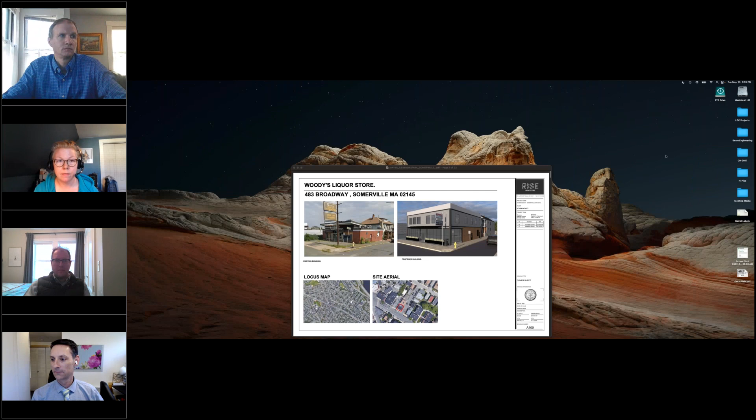I wasn't prepped too much on how this was going to go, but I'm assuming it's similar to other ZBA meetings, so I guess I'll handle it that way. Would I share the set of plans that we submitted? Does that make sense? Let me see if I can navigate that. How about that? There we go. Should have the set of plans in front of us there. So as you know, this is an MR— thank you, sorry, what's that? Just wanted to confirm we can see your slides. Thank you, okay, great, excellent.

Thank you. So as mentioned, this is an MR4 zone, and we were seeking a variance for a couple of elements that we received, in order to keep the project in scale with the neighborhood. That's why we only have a 2-story structure proposed here, as opposed to the requirement of 4 stories.

This is what we have so far generated in terms of our design. We were keeping as much of the existing building as possible and just extending it towards Somerville. Right now, currently the building is existing here, as you can see in the top left slide. It's completely contained in Medford, so we would be adding into Somerville, and that's what puts us into the current status that we're in.

With that said, the area that we're adding into Somerville is a total of 505 square feet, which is relatively small in proportion to the whole building. As you can see here, that red line is the line between Somerville and Medford, and what we'll be talking about tonight is the area that pertains to Somerville in our facade and the exterior that we're working on.

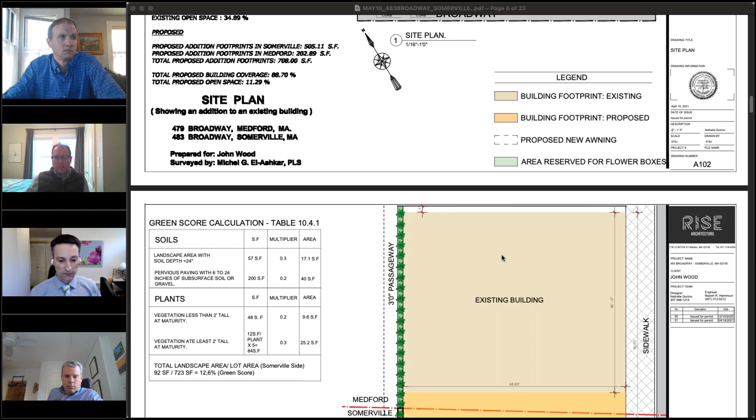We've been looking at our building and site and trying to maximize what we have in terms of available space, not only for the use of the lot and the building, but also for the amount of area we can use for plantings and things like that. Based on our neighborhood meeting, there was certainly some input from the neighbors that said it'd be nice to have some green area.

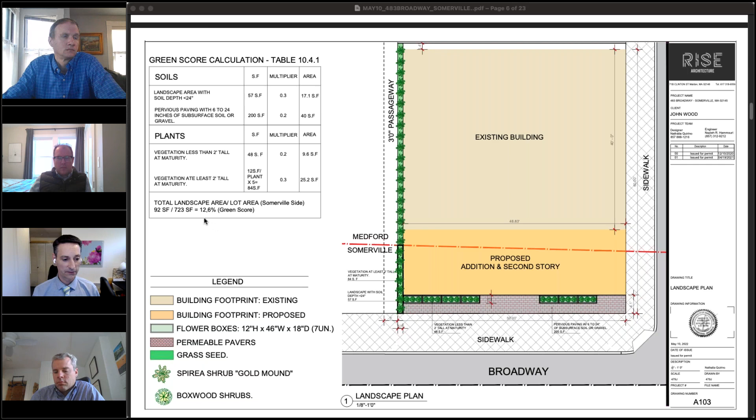So as we were mentioning, trying to make the most of what we can that's available. The building is existing, and our idea was to not disturb our boundaries with the neighbors on the existing sides, but just to extend to the area that's really not too usable otherwise at the moment with the new building. So based on that, we've worked up our green score, trying to get it as high as we can. As proposed in Somerville, we have 12.6% on that, and again, that's based on what we have available in the space we have here.

And currently there is, where the sidewalk is highlighted, if we go back to the existing site, you'll see that we had a curb cut currently right here, that on the existing site only was about 14.8 feet from the property line to the existing building and structure at the front entrance. So really not enough space for a car at all to park, but yet that is what people were doing, and therefore it was sticking out into the walkway that passed the property line. So really nothing could be used there for parking.

So our concept was to seal off that curb cut and allow parking along the street as it does down the rest of Broadway, and gain a few spaces that way that can actually be functional and usable. As we go down here to our building...

We can look at, and again, we got a variance approved for the height to keep it lower than what's required. There's a 10-foot height requirement for the second floor. We have that reduced as well.

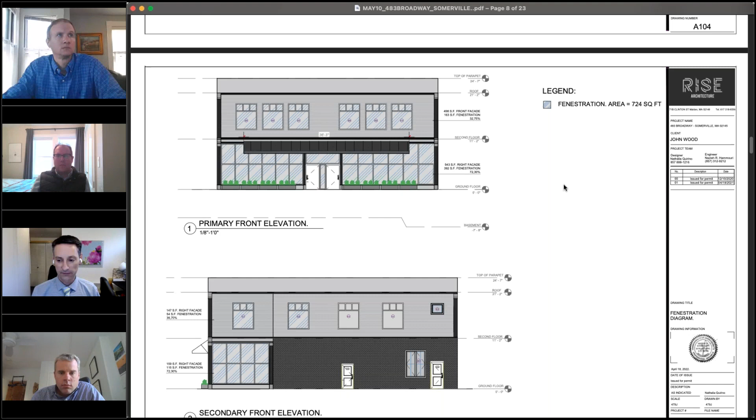And again, if we look at our concepts here and the existing pictures, it really is a neighborhood of residential buildings around it. And even the Salvation Army building to the left is a relatively low structure. So we're trying to mesh the two neighborhoods, so to speak, as we are on the border of both, and keep it in line with what's around it.

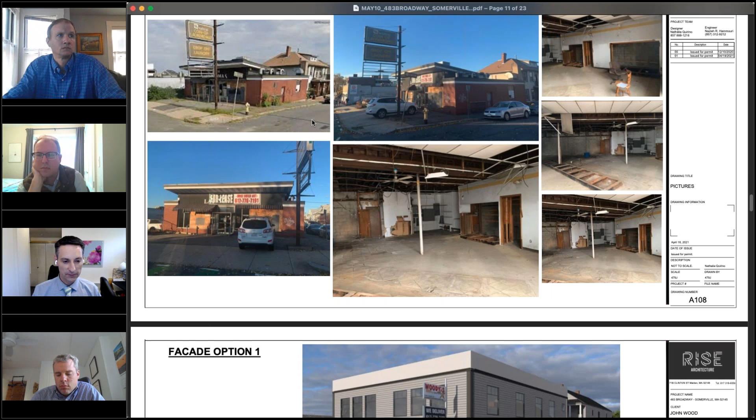You'll see a variation of wood structures as well as brick structures nearby, and some of those can be seen in these pictures, but not quite all of them. So based on that, we were trying to incorporate some of the brick that we have in at least one of our renditions, but this was our facade option that we had initially thought of, with some wood siding, a different material, smooth surface for the parapet to kind of break that up. And then here you can see the existing brick structure that we were adding on to.

And so that's where we'd start our facade for the entrance and around the corner there. And so that is this element here with our plantings. We're trying to get as much as we can, obviously not a ton of space available for us. Our second facade is similar, but it's more of a traditional panel design on the corners, with some inlays and some wood panels framing in those openings a little bit more. Again, similar with the wood, just a little bit different take on that, and you can see that here as well.

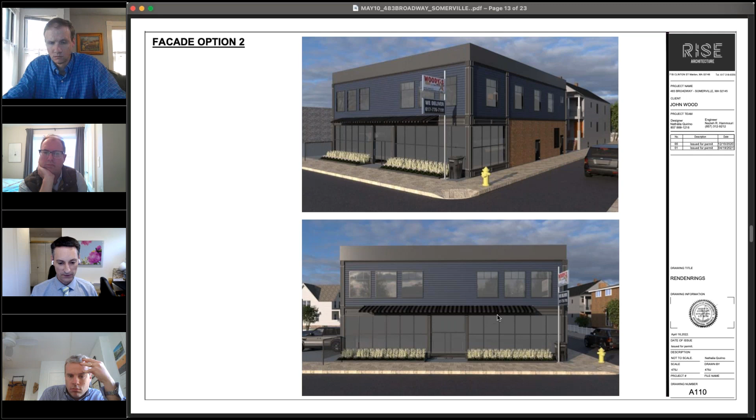And then our final facade, we're really incorporating more of that brick. So as you go down Broadway, you'll see more of this brick as you go towards the center intersection there. And so this is trying to work some of that back in, with a little more classical detail around the windows, with these arches and some overstated window sills as well.

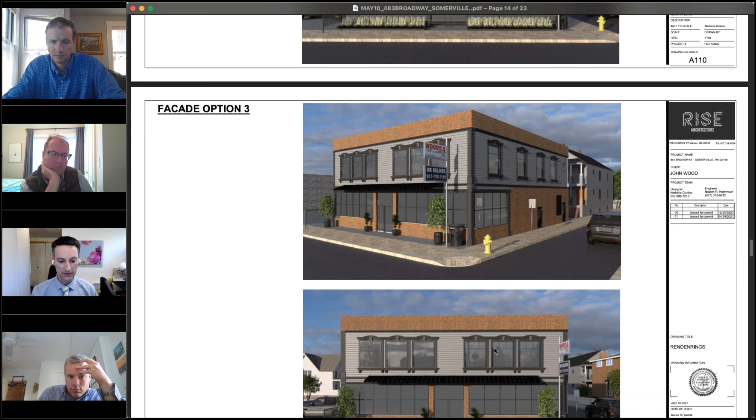So again, the idea is really to try and come up with a facade that blends the two neighborhoods, but also enhances the neighborhood, something that the neighbors will feel like belongs here, and it's in the right proportion, right scale, and not really trying to make it look too massive and overbuilt.

And so that was really the concept for the look. Space-wise, it's going to be two spaces. The first floor is going to be one retail space, a smaller one for a tenant, and the other is the larger for Woody's Liquor Store, who's the owner of the property. I'm not sure if he's on with us today, but this would be his space, which has two stories, as well as the retail space, which has a storage space above.

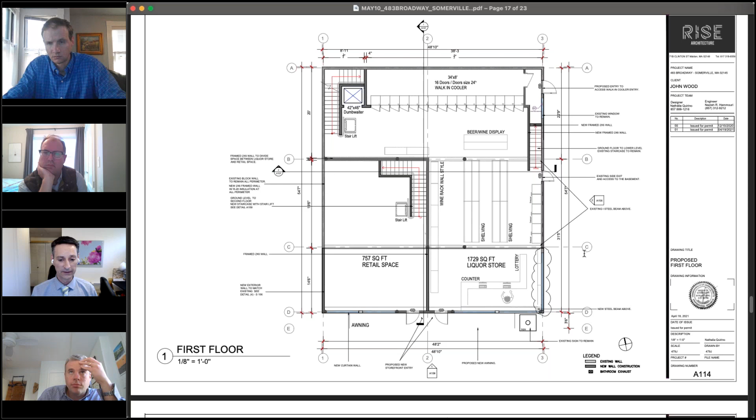And so that was the intended use, is this would be storage. He does need a lot of storage. And then the second floor for the unit would also be storage. So at the moment, he doesn't have a tenant, but he didn't want a restaurant or anything like that. So that was not in the plan.

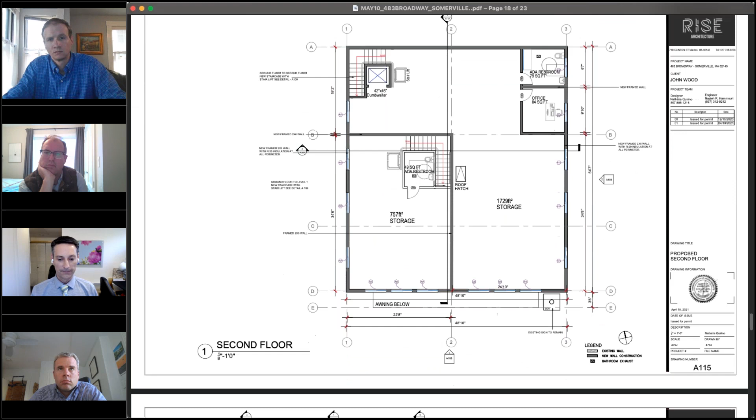There was some talk about what would be decided on and how that would be governed, if it would be governed, who would be the tenant. But I think that does come under the purview of Somerville in terms of who rents the space. So that might be something that would be discussed.

Another element that we discussed in our neighborhood meeting was mechanical equipment, which will be contained on the roof within the parapet, so sound will be isolated from that. They won't actually be located in the Somerville portion of the building. They'll be in the Medford portion towards the back. But that considered, we did talk about sound and how that would affect anyone nearby.

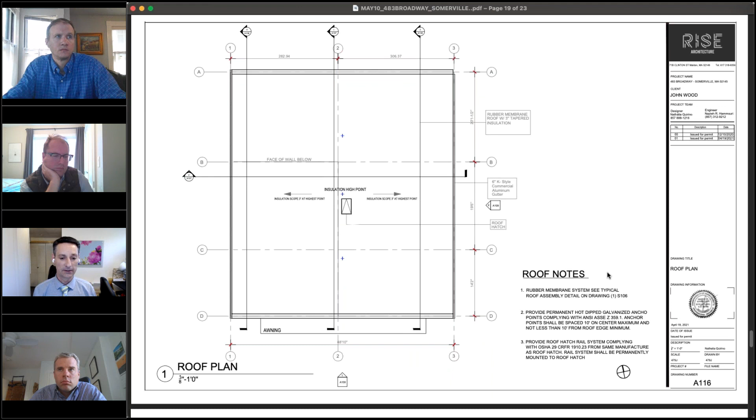But based on what we had in our specs from the mechanical engineer, the volume and the decibel level was much lower than what could be considered the maximum at street level. So we should have relatively no impact on the sound, at least on the Somerville side.

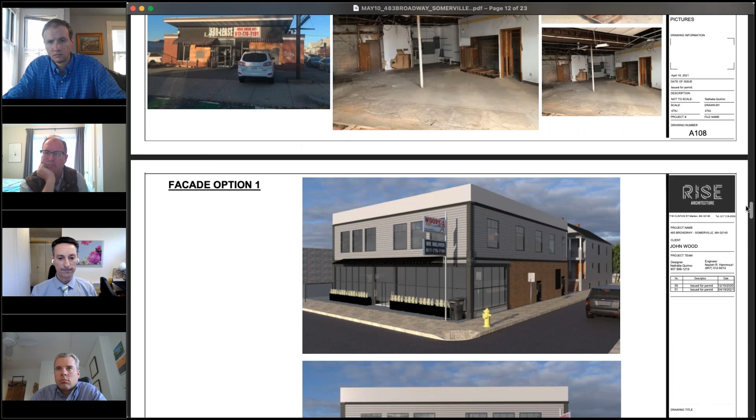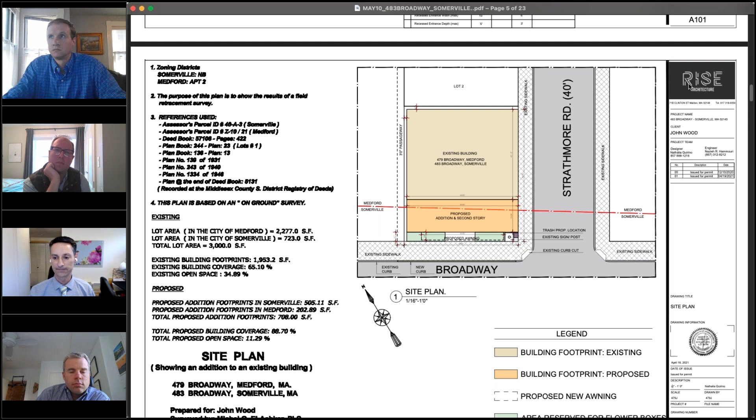And the overall building height, we're at 24 feet 7 inches from the ground up. So that's really the parameters of the project, and why we're at the point where we're at in terms of scale, size, area, footprint. Happy to answer any questions, but at this point I think we can turn it over to the commission. Thanks, Tavis.

Commissioners, do you have any questions at this time?

Can we just confirm the setback from the back of curb is 12 feet? I'm not sure I saw that dimension on any of the plans. Can we confirm the setback of the face of building from front of curb or back? I think it's just making sure that it's the 12 foot required. So, if we put a dimension on this curb here on the sidewalk, we have 4 feet from the property line to the building. I know that much, but I'm not sure what the sidewalk is. We don't have a dimension on that depth. It looks like it makes it, but it would be good to confirm. Yeah, sure, that's a 12-foot requirement, so I'll make sure we have that.

Deborah, I think you had your hand raised. Yeah, I had a couple of questions. The first one is, it has a very heavy top, and I'm wondering what happens at that top, aesthetically. And my other question is, I see a garbage can or a recycling can or something in the front of the building on the corner, and I'm wondering if you looked at ways of accommodating that, not putting it out on the sidewalk.

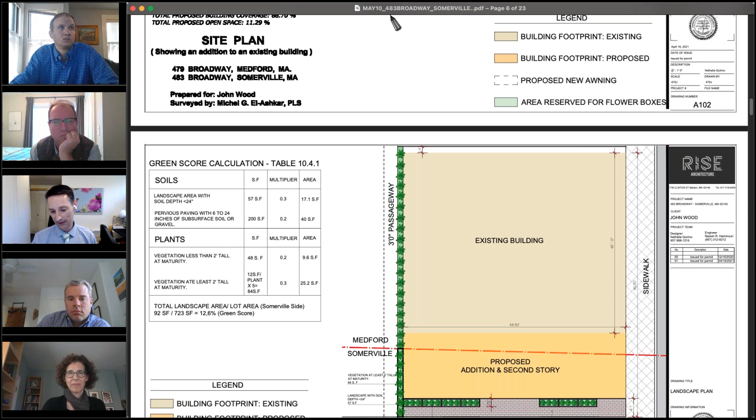But in answer to your question in terms of top heaviness, the building extends up as a result of a parapet that we have going around to really hide the mechanical equipment and also contain the water runoff and direct it to the scuppers that we have going out to our downspouts. So if I go to the section here, you can see exactly what that looks like, in this area here. It's one of those fairly common architectural designs for flat roofs, but that's what's happening up there, in case you want.

I'm just thinking it would be great if that garbage can were not on the street or outside. Or the building created a place for it where it could be hidden from the sidewalk. Anyway, I appreciate that you have it there, so it could be talked about, and it's something you resolve at some point.

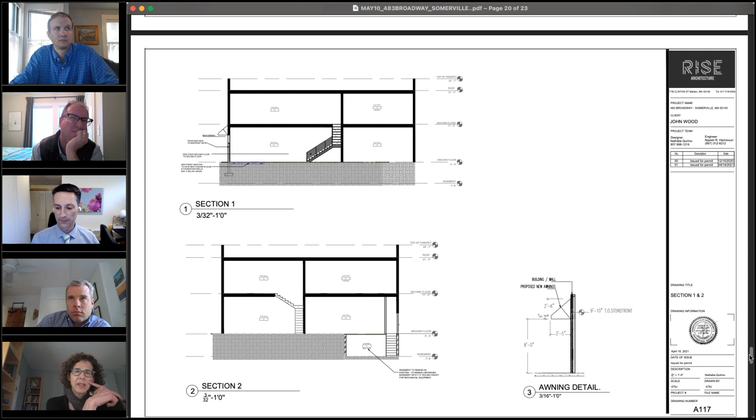And then the only other question is, the canopy doesn't cover all the windows, I imagine. What's the exposure of this? Is this the south side of the building? I'm just curious what the thinking is on the canopy and why it doesn't go all the way to the ends, or if it's just slightly askew from south.

Yeah, so this is the south corner, you could say, right on the border of Strathmore and Broadway. So it is fairly bright there, you're right. Extending that to the ends certainly seems reasonable. Depends on the function of it - is the idea that it's shading the windows to some extent? Okay, so then it probably would make sense, if that was more functional. Okay, thanks.

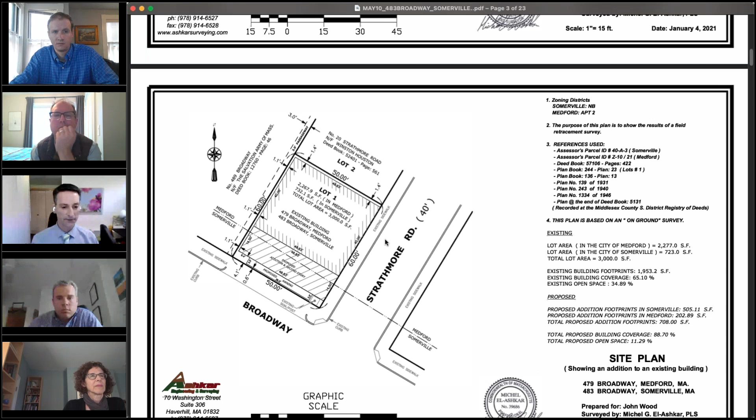One more question on the survey real quick. There's a 3-foot passage shown - is that an easement on the other property, or what is that? I believe it is an easement. It's not part of our property. So it's some sort of access, but I'm not sure exactly what it's for, but it's not encapsulated in our property. I'm not exactly sure why the engineer put it on there, but it's outside of our footprint, outside of our lot.

Any other questions from the commission? Has there been any discussion of adding street trees along Broadway? There will be. From our end, we have not discussed anything along those lines.

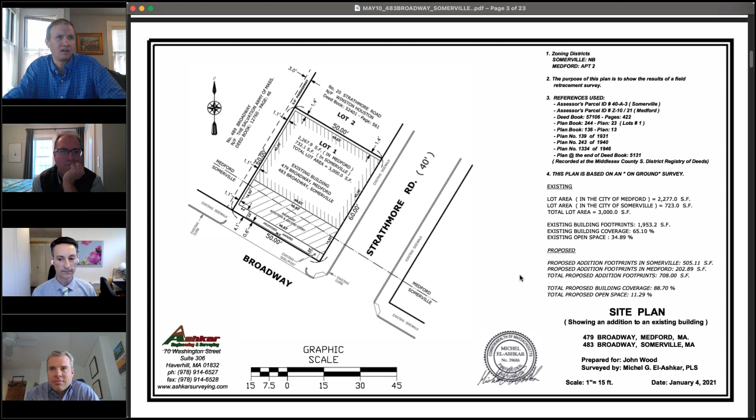All right then, Tim Hood, did you? Okay, please go ahead. A couple of the images had - it was noted with the trash can - and then I just wanted to ask about the signage and the pole there that was shown. I don't know if it's shown in all the renderings, but is that also the intended design for signage?

Yes, I believe that's already been updated based on the city's sign requirements and size, and things that the owner had done recently. So it has been updated, replaced - the intent was to use that sign. That did come up in our neighborhood meeting, about putting this sign on the building itself. The owner said he had already been through it with the town with the existing sign, and based on visibility and how people would see it and notice it, that was the preferred method for him. So he did update that sign to be new, and I think that's reflected in this rendering here.

Just for clarification on this too - so Woody's enters through the right-hand one of these doors, and the tenant enters through the left. What is this? I guess what is the material between them, or how does that work exactly?

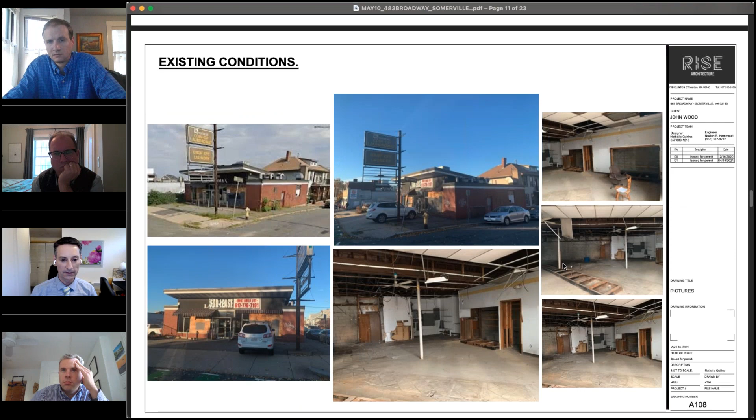Yeah, so at the moment we had a few different versions of that, so the plan may not reflect that as accurately. You see it sometimes in commercial buildings where you'll have a glass facade with a demising wall coming into it, so that would be a tinted glass panel in between and at the top. Those two would hide the wall separation between them, but the wall is directly in the middle between those two. It's one of those games you play when you have interior space and outside windows - you're trying to make it all look uniform. That could be done differently - it could be a solid piece in between with two separate pieces above. I'm not sure the architect has worked that out completely yet.

All right, commissioners, do you have comments at this point?

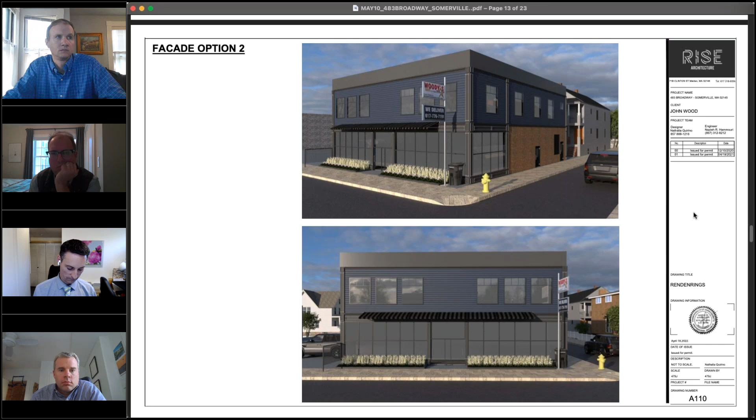I think a streetscape plan would be helpful. I would definitely coordinate with the city to understand if and where we can place street trees, if there's a vision for Broadway that has some sort of understanding of what the materiality would be in the amenity zone of that 12-foot setback that we have. I think that would be good to start with.

For me, I think the nips issue is real. I've found the nips in my yard, and they are a pain in the butt. If it were me, I'd be trying to work with the city to site a Big Belly in this location, as opposed to trying to deal with it with a bin, which doesn't seem ideal. But I think the streetscape just generally needs to be progressed.

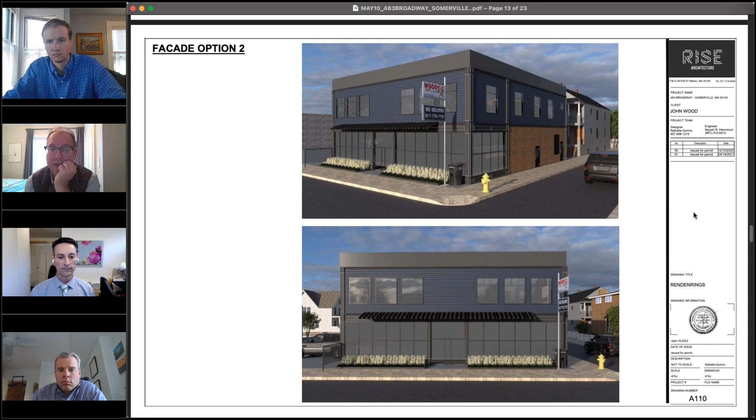I'll kind of leave this one to the architects, but for me it does seem a little odd. The building looks like a single use building right now. I'm not reading that two tenants or two separate businesses would be using this space, just the way the facade is set up, and that seems a little bit confusing to me.

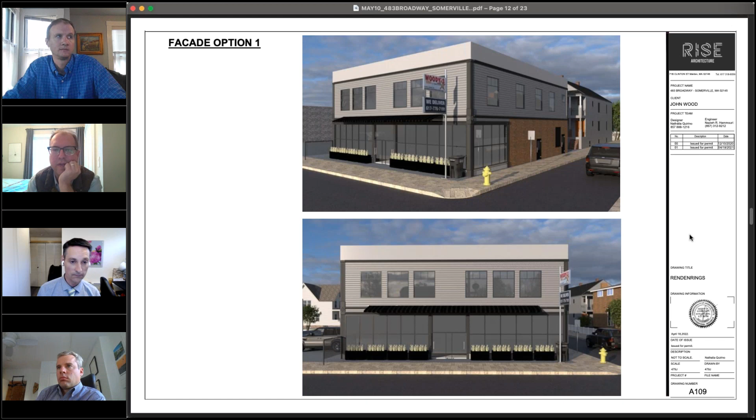The last thing is just within the green score plan. I understand the city's going to figure out how to deal with green score on this weird situation. I would say in the plan right now, there's that row of spirea on one side of the building, and it's not set in a bed that's big enough to accommodate it. So I would consider something else, or letting that idea go. It's shown in like a 1 foot wide bed, which is not going to work. Spirea is tough, but that's hurtful.

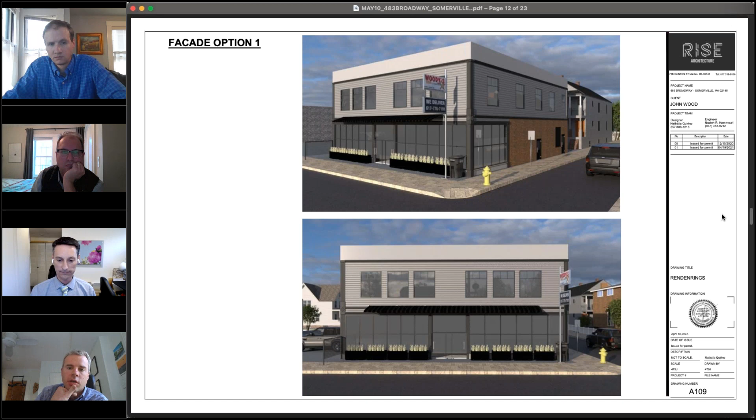Is the brick shown in this image intended to be the brick of the existing building that's being built around? It is, yeah. The idea was to leave as much of that as possible. Okay, so that remains unchanged, and you're building around that. Correct. And so those openings, the two doors and the window, are those existing openings, or maybe a door's getting replaced within that?

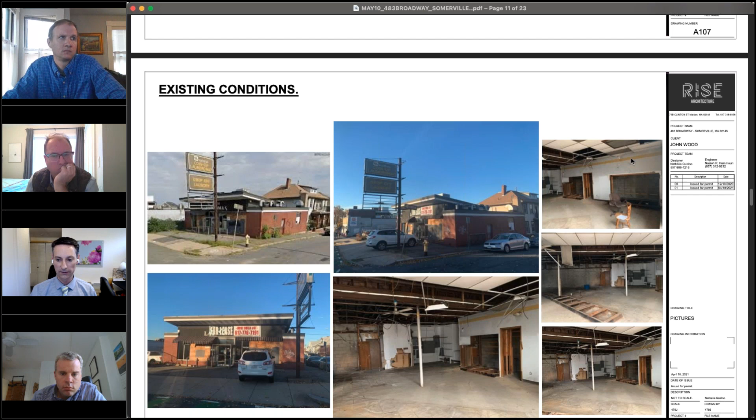Let me just confirm the back door. I know this one is the basement access, which we're not changing. But the other one, just make sure that it's existing. Yes, we'd be adding that other door. Right now, as you can see in this picture, this is the basement door, so we'd be adding one in this back corner. So this one here would be a new door, that last one at the end.

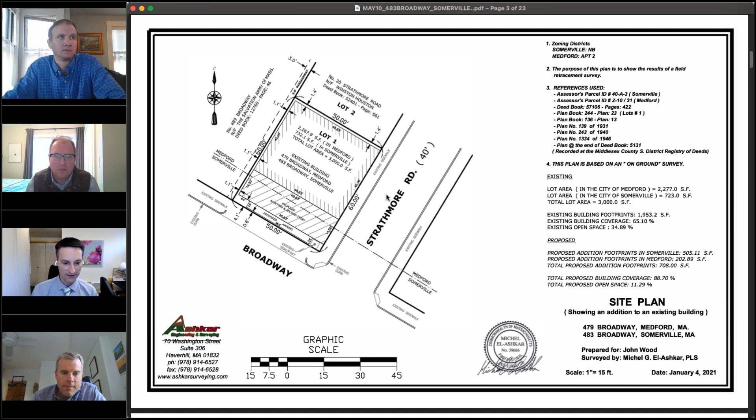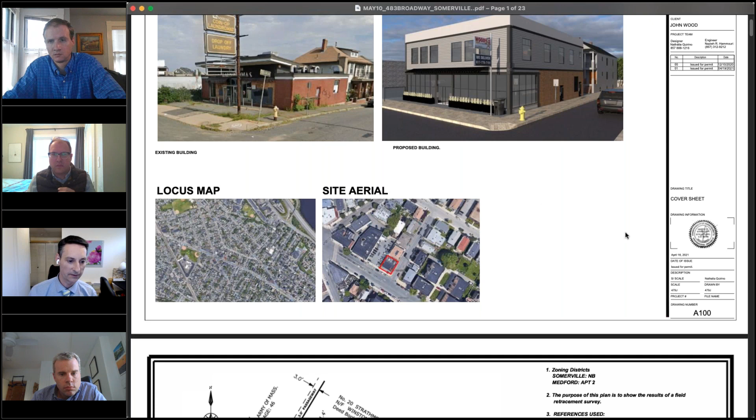Have you done the width of that sidewalk on that street, on Strathmore? Let me see if it's on the site plan, but I don't think you put many dimensions on the site plan for the walkways. But it looks to be a fairly wide one there. I would say it's probably a 5-foot sidewalk. Yeah, so my concern would be if it's a 5 or even a 6 or 7 foot sidewalk.

Especially if you're adding program to the building, if the door is getting used more, swinging into the space of the sidewalk, whether there's the opportunity to pull that door swing within the footprint of the building. It doesn't look like it on this plan. I guess if it's an existing door.

Is the intent that deliveries go in there? I think refrigerated items, I'm not sure. That would be a question for the owner on use for that, because it goes right into the walk-in cooler, which is kind of a unique scenario. I'm not familiar how often that gets used, but my guess would be they'd probably be loading some cooler items directly into there.

Is that right at the property line? This wall is right at the property line, correct? Okay.

So I think overall on the facade options, I'd be concerned about something like option 3. You're rendering what I now understand as new brick and old brick to be the same. I doubt there's really going to be the ability to match that whole process, which can be extensive. So I think either the brick should be clearly different on the new building, or it shouldn't be used on the new portion.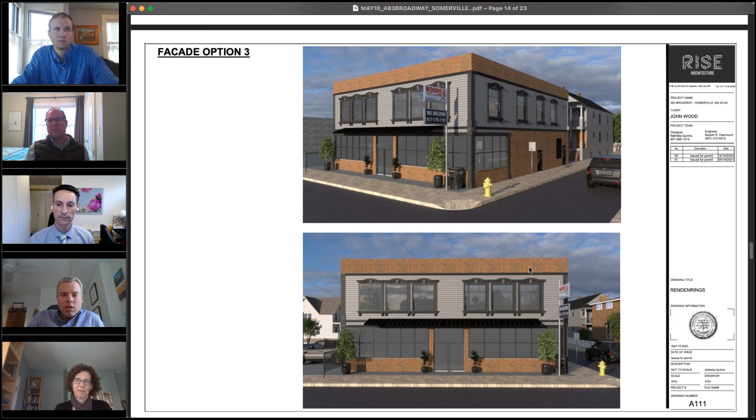I think maybe Deborah was going to go here with her comments, but I think the top of the building does feel heavy to me. There's no reason why the cornice needs to align with the roof level exactly, and have the entire parapet rendered in a different material. So proportionally there's an issue that I think is resulting in an overall composition that's accomplishing something different than you described, creating something that is out of scale with some of what's around it.

And I wonder if these really are two separate tenants. The pier element along facing Broadway, it seems like there'd want to be a solid separation between those. I understand the intent to run a solid wall into the back of a mullion or something, even though the mullion isn't shown, but I wonder whether that's really the right approach here.

I think it would be helpful to understand what the plan is for signage, tenant signage on the building. I know there's a freestanding sign, but...

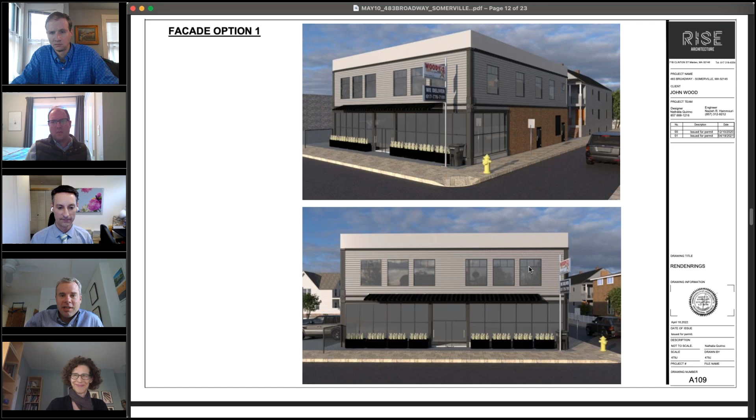Just a last comment, and this kind of goes to overall proportion - there's something weird going on with the height of the doors on the elevation. They look like they're about 5 feet tall, like a door in a preschool or something. So I think we need to see elevations that accurately reflect what's going to get built.

So Tim, if you're done - okay, so I'll go. I agree with you about the parapet, that's why I asked the question. It needs more articulation. And in terms of, I can say that I have a preference for the second option, the darker one. It feels more in the scale of a commercial building.

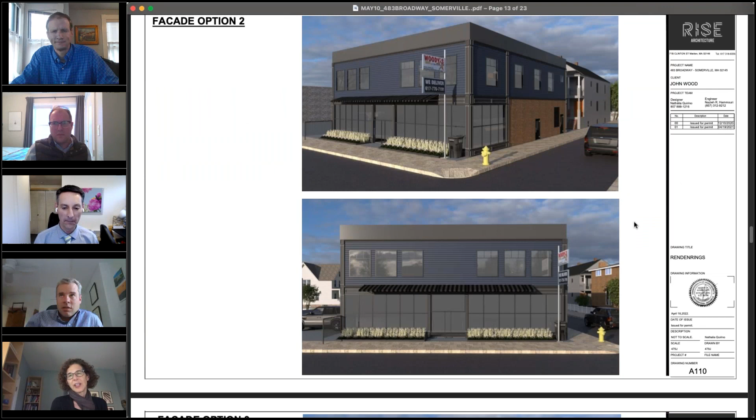The first one, I shouldn't be looking at - I've got the screen on bigger. The one we're looking at right now looks like it's trying to look residential on the top level and commercial on the lower, and it's all a commercial building, right?

I like the idea of the darker treatment on it, and something that sort of unifies the building and just makes it look larger and more commercial.

I would agree with the comments on the upper portion. It does feel heavy, and just the way that it's rendered, it's coming across a little bit too flat. So maybe, as it was pointed out, some articulation at the cornice, and maybe it can be shrunken a bit.

And then I was wondering about the relationship between the second floor and the first floor. It looks like the upper story windows don't necessarily have any relationship to the curtain wall and the mullions down below. So I think it might be a good idea to tie in the upper story windows with the windows below, and the first floor awning, if that can also be aligned with a window above or a mullion below.

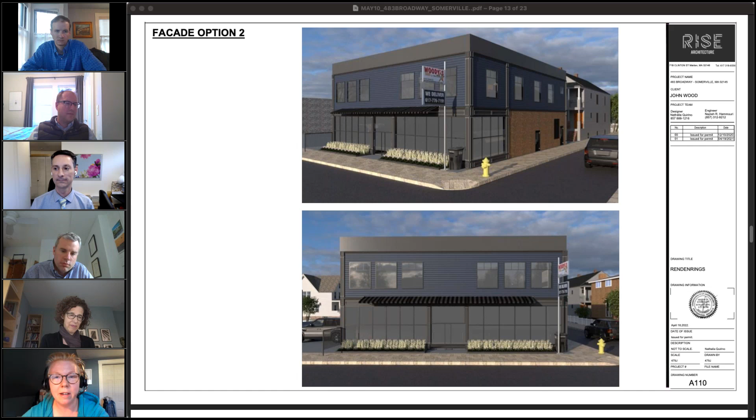All right, so with that being said, do I have a motion to continue the 483 Broadway project to the next meeting? Motioned by Andrew. Do I have a second? Second by all of you guys. I saw Deborah's mouth move first, so I'm going to count her.

So roll call vote: Andrew Arbaugh, yes. Deborah Fennick, yes. Tim Hood, yes. Tim Tallon, yes. All right, great, thank you, 483 Broadway. We'll see you next time with a further developed facade number 2. All right, thank you very much for all of your comments.

Have a good night. Thank you. All right.

The next project on the agenda is 153 South Street, Thoroughfare 1. I'd like to recuse myself from this project. Let the record show that Commissioner Arbaugh is recused from this project. If the 153 South Street team can make themselves known so Andrew Gruminski can promote you.

Hello. Hi, Ian. Hello. I think it's just me, although Rolla from Leggat McCall may speak. So if there's questions, I'm going to go ahead and share my screen.

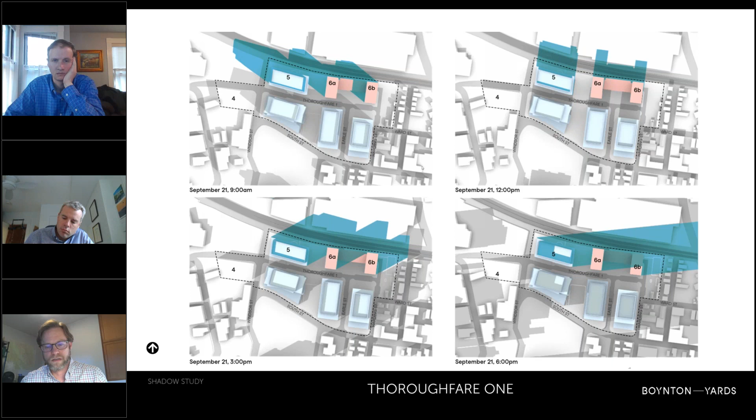Moving into September, which is the same as March, you have a lot of the same conditions in terms of solar aspect. Then in December, long shadows — it's very much in shadow for most of the time. Of course, at noon you do have good solar exposure at that central part.

So again, we wanted to share this with you because we didn't have it before. We will continue to be mindful of where the shadows are, with our plant selection and the placement of movable furniture.

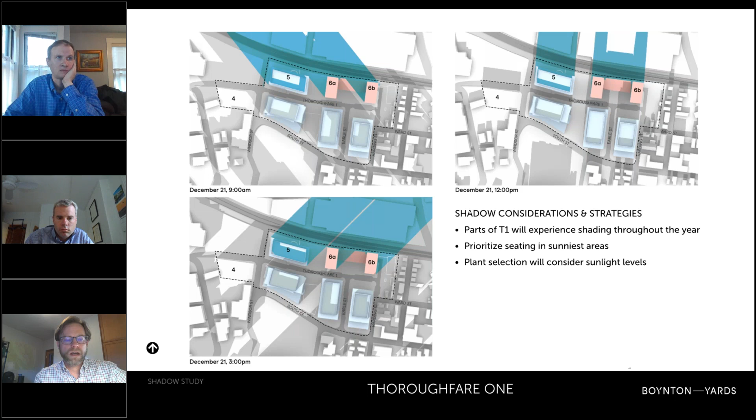We think that the design of Thoroughfare 1 really is going to discourage and become a less attractive option for people traveling by vehicle, by car.

Part of the reason we feel that way is because, in addition to the studies for Thoroughfare 1, there's a summit of development and city players around the revisioning of Columbia Street and Windsor Place to the west of Thoroughfare 1. There's a concerted effort to bring a much more robust and integrated level of pedestrian circulation and bike facilities on both sides of that road, linking from Webster into the Boynton Yards site. We think that's going to be a very attractive corridor for bikes and peds, and through that process the travel lanes are going to be narrowed for vehicles, which will further discourage the path of travel for cars coming into this portion of the site.

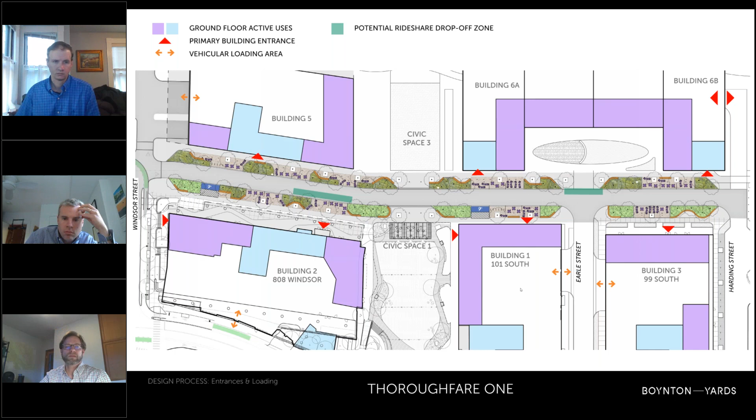Another comment was about digging further into the details of the thoroughfare material. Sherry had a good comment that we were approaching it as isolated, compartmentalized moments of different materials, crossing at the civic spaces and again at Earle Street, which broke down the flow of the thoroughfare and made these discrete compartments.

So the challenge is to take that idea but extend it through the entire length of the thoroughfare, to make it feel like a continuous plaza, and also find ways to integrate the shared drive area with the side areas and access into things like the civic space and the courtyard.

We have two concepts to show. The first is a modular concrete panel system with a regular, staggered grid pattern. The idea would be to use different types of integral color or exposed aggregate finish in those panels to create interest and a meandering line that draws your eye, making it feel less like a road and more like a public plaza, with the pattern language extending into the civic spaces and maybe the courtyard of Building 6.

We really like this, and there are opportunities where, of course, you'd have to get back into the road for utilities. There's a logic here where you can saw cut along the pattern's joint lines, remove the concrete, do what you need to do, and then replace it with something sympathetic to the overall concept.

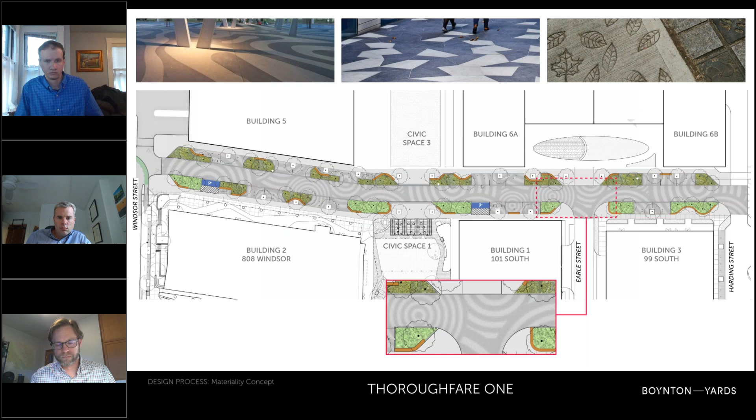In terms of lighting, we prepared this night rendered shot that shows how we envision the light to be distributed throughout the thoroughfare.

Because this is a city street, or will become a public city street, we'll use the city standard fixtures. On the left, the shorter post top light would be used in the longer stretches of the thoroughfare, while the taller arm and pendant fixture would be proposed at street intersections - so at the end, at Earle Street, and on Harding, with the run of shorter, more pedestrian scale fixtures in between.

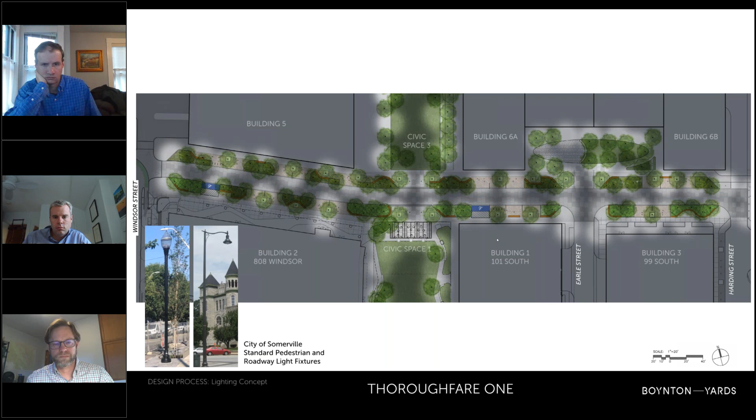The last thing to share has to do with bike parking. The comment was about understanding where bike parking was relative to the civic spaces, recognizing there's probably a strong desire to have bike parking close to them. Civic Space 1 doesn't have bike parking within its own parcel limits, but there are bike parking spaces associated with Building 2 and Building 1 on either side.

We did a blow up here showing that on the north side of 101 South, there's a bank of parking that's actually pretty close to the civic space itself.

And then there's a row of them on this north side of the thoroughfare as well. The other thing we've talked about in response to that comment is that in Civic Space 3, we're going to develop a combined parking area where we can have up to 20 bicycles and other scooters or mobility-type vehicles located within that civic space, centrally located.

And the last thing to point out is that the development is committed to providing Blue Bike stations, 3 stations of 19 bikes each. Those have not been located yet, but that's something we're going to work through with the mobility department. With that, I think that is our last slide, so happy to answer any questions or go back. Thank you.

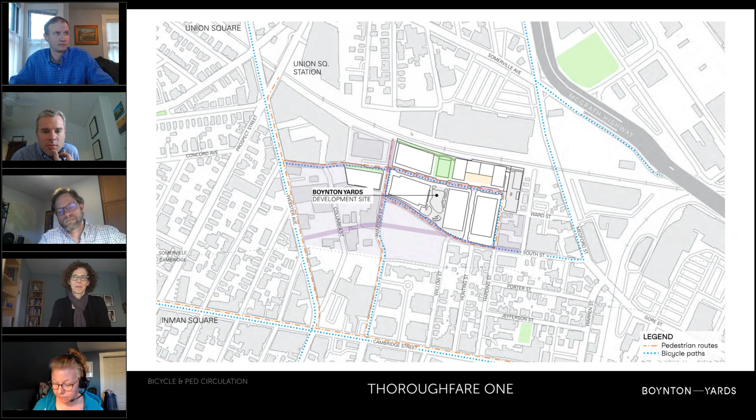Certainly, I think, so where to start? Maybe starting at the macro level, and the broader circulation within Boynton Yards. I think those diagrams are very helpful in understanding that. I think what they highlight is that to accomplish a lot of what you're talking about, the ends of the street are going to be very important, how that's treated to really make it feel difficult to go straight from Columbia and Windsor onto the street.

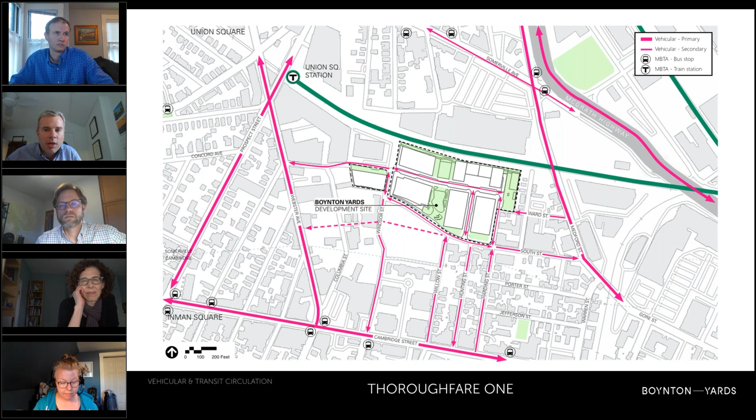I know that's probably a further level of development, but I saw there seemed to be an indication of maybe rounding the corner around the Taza Chocolate Building, or something to make it seem like you're making a hard right turn there, but for Windsor Street to be continuous around the corner, and for that threshold to feel like a threshold onto the shared street. So appreciate that, and hope to see that in the further development of this as it moves forward.

At the other end, I wonder, seeing this and understanding Ward Street is a one-way in, South Street is a one-way out. I know there's been ideas for South Street, thinking about whether that stays one-way out or goes to two-way, and how bikes are accommodated on that street. Seems like the current thinking is it stays one way in. But I wonder for Ward Street, I'd anticipate it's kind of a busy street.

Oh, interesting. Now I'm realizing South Street, this diagram is indicating South Street is changing direction. That's correct. That's the proposal, of course, before it goes to a two-way condition ultimately. Right. Okay, so there's a lot of traffic from Medford onto South Street today.

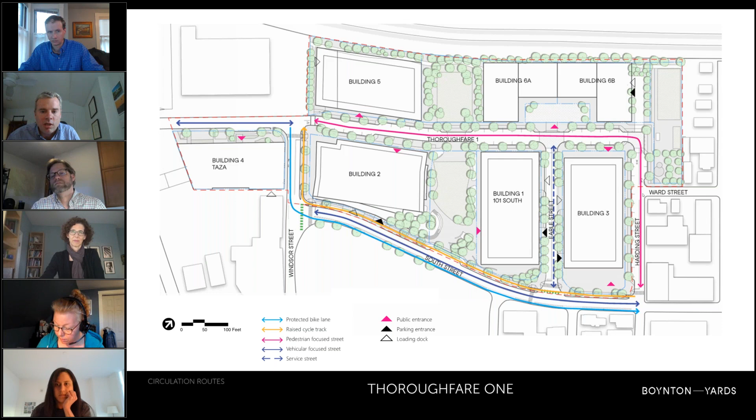So I think that same traffic is going to be on Ward Street now turning in. So I wonder, it's kind of the shortest path to the parking entries for Building 1 and 3 — I guess it's similar if you take a left or a right there. I wonder whether the shared street treatment wants to continue around the corner to Ward Street, so as you come in, it's very clear, in a similar way on the other side, that you're making that right and that's the vehicular street. On Ward Street, you're coming in and making the left onto Harding, and that's the vehicular street. You don't make that right turn because that's part of the shared street. There'd also be an opportunity for that to function as an extension of the civic space as well.

Yeah, we can definitely look at that. I think we're indicating a tabled condition — well, obviously it's all tabled, but we're indicating some type of transition here where it changes from the below curb condition to the flush curb condition, and maybe there's an opportunity to extend that down and get more relationship with the southern part of civic space too. Yeah, I think that's worth looking at.

Well, maybe I'll leave it there for now, and others can make comments.

I was looking at the entrance diagram, specifically at building 5. It looks like for the most part there's a generous space in front of most of the entrances. But just looking at building 5, it looks like there's a bench there, and it's more of a pinch point.

So I was wondering if there was a strategy when you were developing this in terms of space in front of entrances and locations of the benches—like as people exit that building and go up to the space in the street—to enlarge that space at entrances and maybe reconsider where the benches are located.

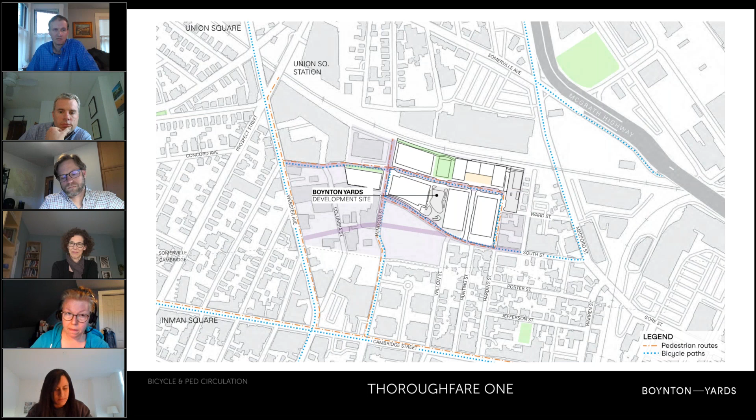Is it intended for that to be a kind of short-term wait where cars will go around the vehicle that's stopped or waiting, or is there enough room for that?

And then I was also wondering, depending on where these wind up, would there be special signage to indicate where these areas are, or possibly a coating on the ground, like a material change or something?

Yeah, I think there will be some type of signage that the engineering department is going to want us to have that would designate those zones. I think, with the modular aspect of the paving pattern, there's an opportunity there that we could do something a little different to signify the extents of it on the ground plane. I think that would be good.

And I think because the curb to curb dimension, even though it's a flush curb, is 20 feet, that should be enough space for - we don't expect a lot of traffic here, but that should be enough space for cars to move around the parked pickup vehicle. That's what we're intending.

So as I've thought more about this, the ride share - we talked a little about this last time. I've been kind of back and forth. Does the street want to have designated spaces for that, just knowing that it's going to happen, or not? Thinking about the character of this street, you wouldn't want to designate or specifically mark zones for rideshare drop off. You'd want to just let it happen everywhere.

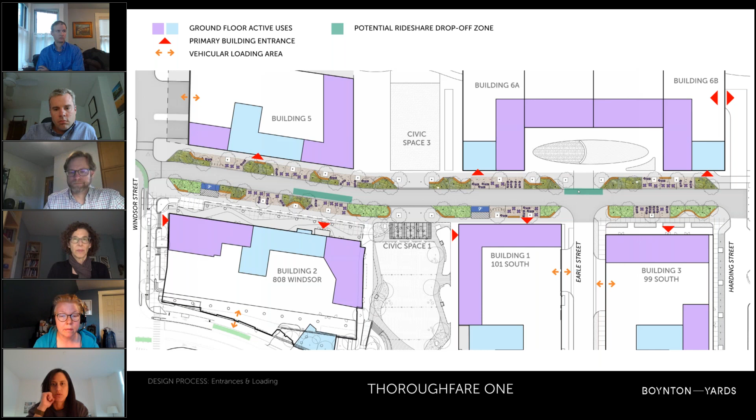Ian, if you go back to the big plan. Yeah, so there's a drop-off zone, and that's kind of where they're stopping and letting people off to go to 101 South. I think we could keep that in the future and just have people walk through the civic space to get to buildings. Building 5 is the only one, and Building 2, that would need access by shuttle. And it's not that far of a walk if you're commuting anyway.

I wouldn't really want to create a huge drop off for shuttles up there on Thoroughfare 1. So I think we'd limit that to South Street.

Yeah, I mean, I think the future of autonomous shuttles and things like that is that we'll see maybe less individual drop off and more shared drop off over time. And you just need the curb - you need a lot of curb space for those scenarios.

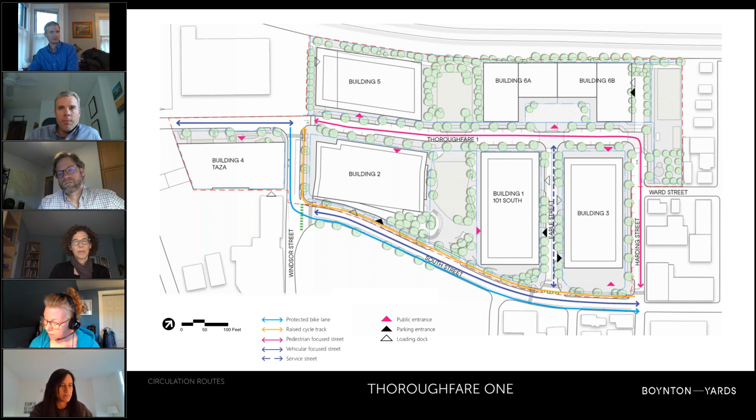So you did a number of paving pattern studies, which I think are all great and interesting. I think the idea of taking a texture and having it not just be uniform out there on the surface of the street would be great.

But I think one thing that changed from the last version is it's now like a uniform material treatment along the length of the street. And I wonder - there's these parallel parking zones and planting zones, and it's creating along the face of the buildings an edge that separates the sidewalk from the street space. I understand there's accessibility reasons for that and other things driving that, but it is creating a barrier between the sidewalk and the street space.

And in that sense, even with a different material treatment, it's going to function in those spaces somewhat like a traditional street. But there's these zones connecting Civic Space 3 and Civic Space 1 that really want to feel connected across them and encourage pedestrian movement across there. I wonder whether there's an opportunity for further refinement of this to further distinguish those zones and really carry the paving from Civic Space 1 across to Civic Space 3, distinguishing those zones from the rest of the street.

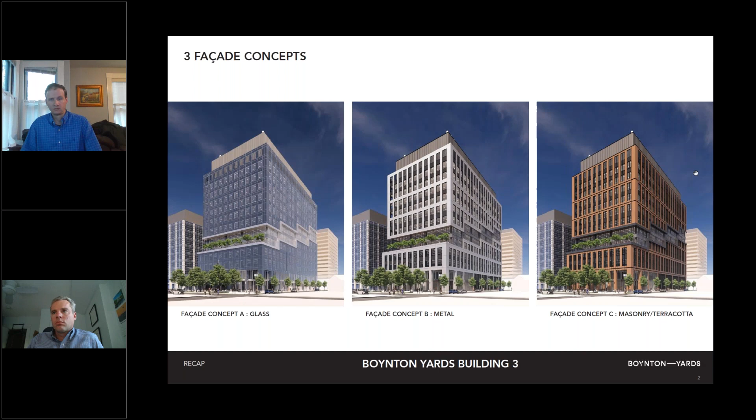Thank you. So just to recap, we had gone through the massings, the fenestration, and the materiality, and what was agreed upon was option 3, the stepped or zipper scheme. We also went through the materiality, and between the glass curtain wall, the metal, and the masonry terracotta, it was decided that the masonry, the warmer material for this new industrial feel, was the appropriate materiality.

Just to recap what we heard: we were looking for the longer views from a distance, options for the different number and size of steps, so we'll take a look at the zippers. Also looking at the north elevation, part of the concern was that it wasn't quite as welcoming and prominent as some of the others, and the streetscape along Thoroughfare 1 not providing enough pedestrian activity. So Ian will jump back in on that as well.

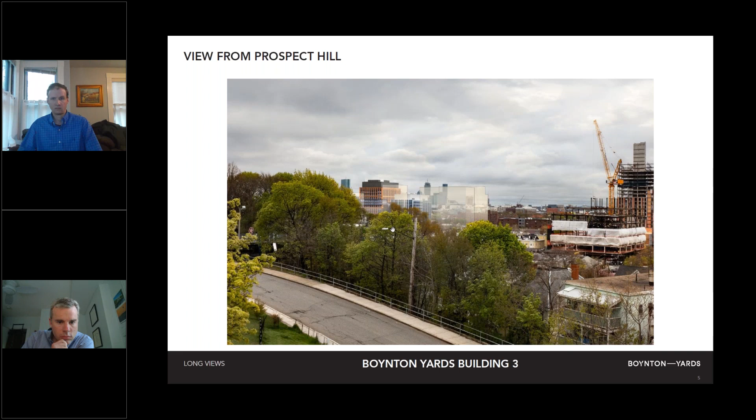Starting with the long views, this is the view from Prospect Hill. You can see in the foreground Union Square, and then in the background 99 South. From Union Square, you can see the profile of 99 South behind it. A lot of the development currently happening in the foreground will make it difficult to see the buildings in the background. Lastly, we have the view over the top of Target, and you can see the residential building that will be in the foreground. You can see 101 just to the right of 99.

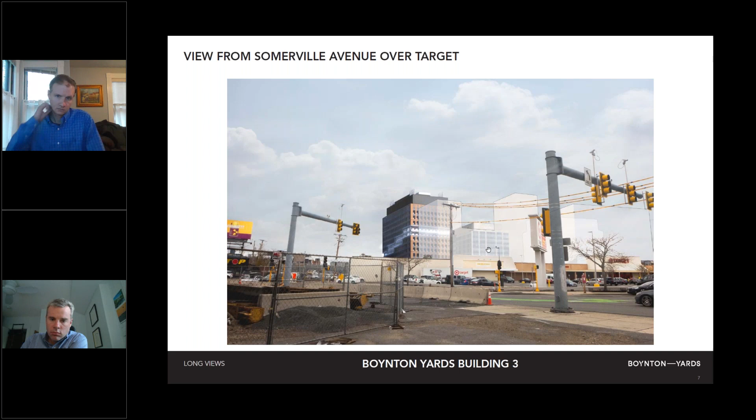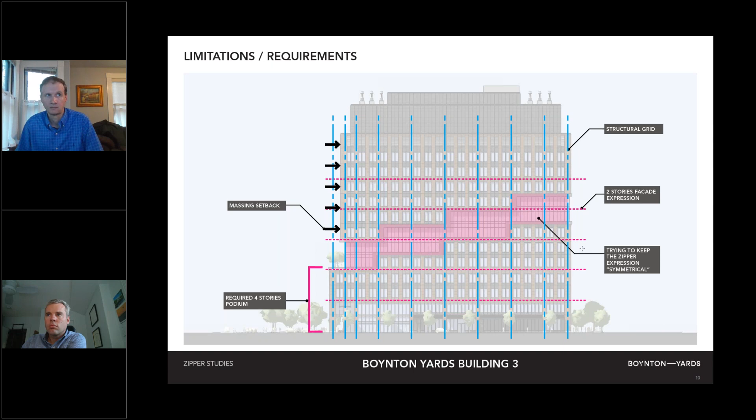Going into a series of alternatives: on the left-hand side we have the previous, basically the 4-step. Option A is 3 steps, then we went to 5 steps, then we looked at a 1-story step, and also removing the frame. We'll go through all 5 of these options.

The first option looks at 3 steps. This is the view from the corner of Harding and South Street. You can see one adjacent to it, again the idea of the base, middle, top, and the setback along the southern edge, and then the stepping as you go back towards the north. Looking at it in elevation, on the right-hand side is along Harding Street. You can see the setback, the stepping in 3 steps, timing out with the 2 stories of steps, so the 4 floors, and then the north and west elevations.

Looking at it a little more closely, this is at the corner of Harding on the right-hand side and South Street going off to the left. You can see 101 on the left-hand side, the arcade, the forecourt, the arcade, and then the setback at the 4th floor. Then you can see the zipper stepping back to the north as it rises towards the height, towards the residential portion of the building.

The option B, which is 5 steps. So you can start to see very similarly in this perspective. When we're looking from the east elevation, this is along Harding Street on the right-hand side. Again, the building is stepping up, stretching out that sense of the 4-story base.

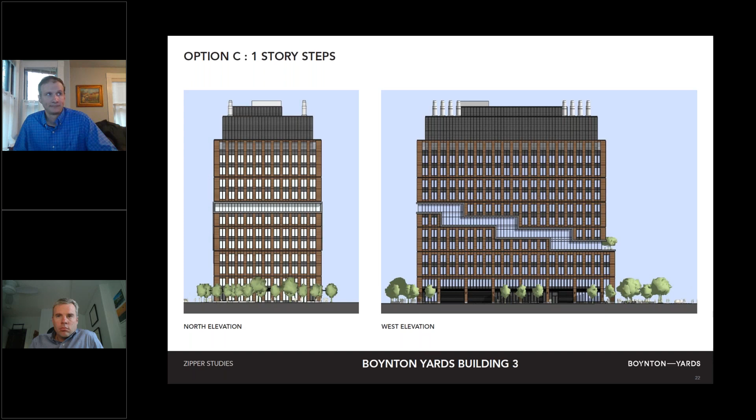And then looking again from the corner of Harding and South, the idea of the four-story option, it starts to step, one-story steps, and then steps up as it rises towards the north, towards Thoroughfare.

And then no frame. We did also look at not creating the frame that kind of wraps around and defines that separation between the two. It was just an interesting way of thinking about the detail here.

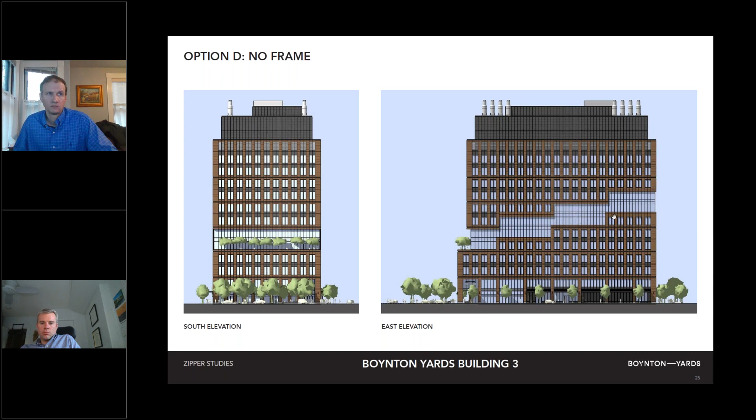This was, again, the four-step version of this, timing out again with the structure. But again, the idea of eliminating the frame - the terracotta wraps around the edges and provides that transition in the stepping. And then going back to the summary of the three previous options: the three-step, the five-step, the four steps with the one-story, and then the frameless option.

And then moving to the north elevation - this was a comment that the south or north side of the building along Thoroughfare didn't feel as friendly and welcoming. So the idea was employing that retail base, really stretching out the storefront in option A. Option B starts to introduce a canopy, and then option C starts to delineate the entry sequence into the building from the Thoroughfare.

One of the things we discussed is the primary entry is at the corner of Harding and South Street, but we do have a secondary entry coming off the Thoroughfare. So the previous scheme, again, times out with the module continuing down - you see on the right-hand side that the pilaster continues down along that edge.

And what we wanted to do is try to really open that up and make it feel more friendly, and really delineate the difference between the base, middle, and top. So in option A, it's really starting to remove some of the teeth that were continuing down, stretching that retail experience out and emphasizing that.

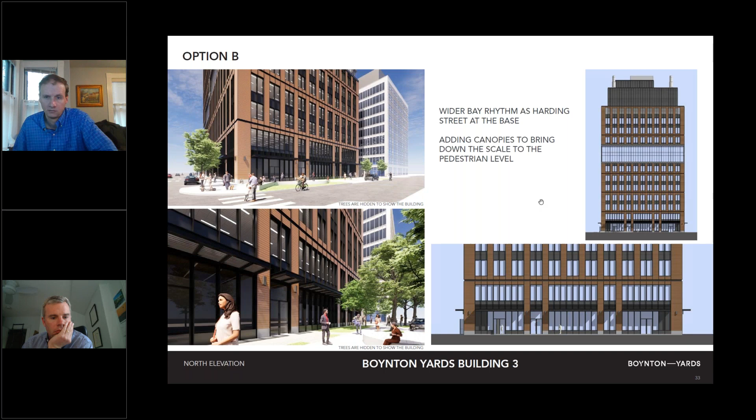So I'll flash back and forth between the previous and the current, really trying to open it up, providing the canopy, and then providing a little bit more delineated entry into the building itself. Lastly, a summary of the three: the previous, where we're bringing all the pilasters down, eliminating some of the teeth to really open it up and expand that experience - very similar to Harding Street, where you have much more emphasis on the retail and the canopy at the entry.

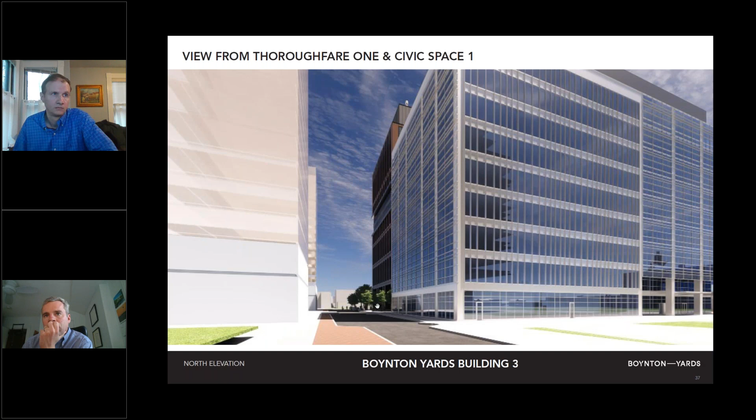And then here's a view looking down Thoroughfare at the corner of Harding. So you start to see that we're picking up that same kind of 33-foot module along Harding Street, bringing it back to the northern part of the building, making it much more welcoming and opening it up towards Thoroughfare. And then the view coming down with 101 in the foreground and 99 in the background.

Thanks, David. So here is the previous plan that we had shown for the northern side, and the comment that we received, similar to some of the architectural related comments, is that the landscape felt a bit compressed, too linear, and didn't really respond to either the building facade or the Thoroughfare in terms of having adequate volumetric space for spillouts outside the building face.

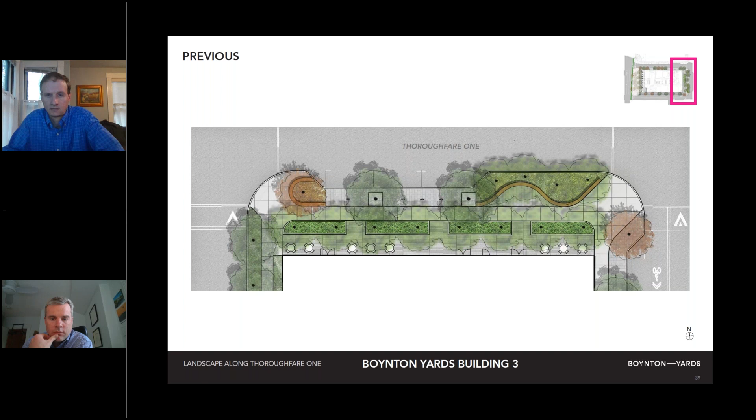And that is our last slide. Thank you.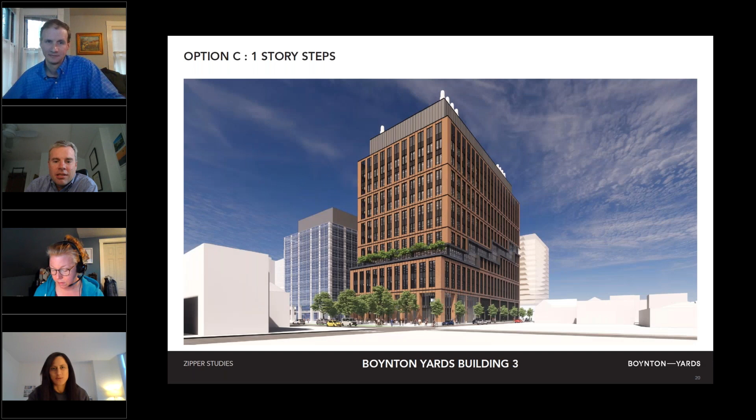Does the design team have a preference on the stepping options? We do. I think the preference would be the 2 steps. 3 step. Or the 3 steps, sorry. Option A. We looked at so many different options.

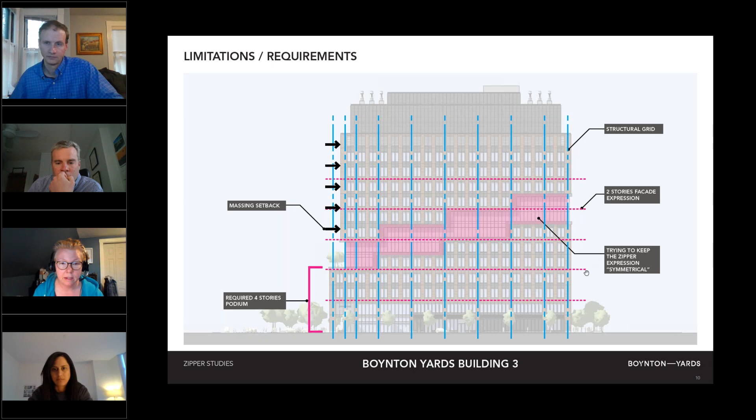So the idea is that we simplified it. I think one of the things that was very telling was this original diagram, starting to think about how it not only timed out with the structure, but timed out with the 2-story kind of expression. I think the long linear feel to this makes it a little bit more simplified. I think the idea that the 5 steps made it feel a little bit too busy. And it also raised the height of the break along thoroughfare a little bit too high for a scaling element. So we thought that the 2-story modules seemed to make a nicer transition.

And then I think the preference still is to have the frame versus no frame on the building. Can you show the elevation of the side elevation of number 3?

Yeah. I think that I agree that this one feels the most respectful of the terracotta patterns that are created and the language. And the scale on the north, I think, is really important also.

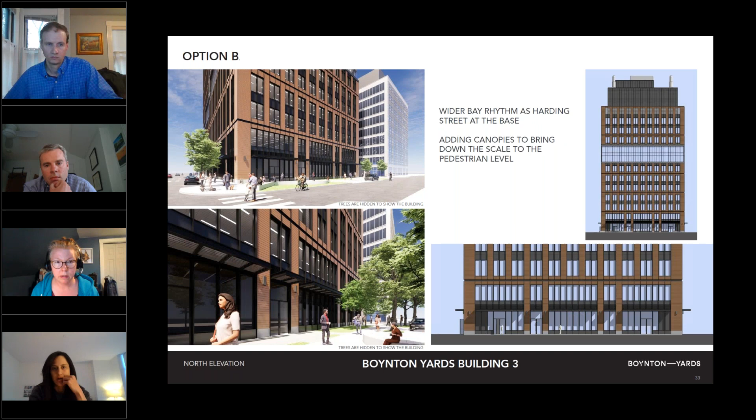We had that in the beginning, but it was more that it would set back and then come back and lever over and create a terrace on the north side. Because of zoning, like we said last time, we got rid of it and didn't push back the top stories because it eats our floor plate. In the lab world, it's all about the floor plate and rentable space, so we don't want to minimize that ideal floor plate because right now it's kind of tight. It would really hurt the project if we did that. We were hoping that by opening up the base levels, it would bring a more open feel to this side and make it more welcoming.

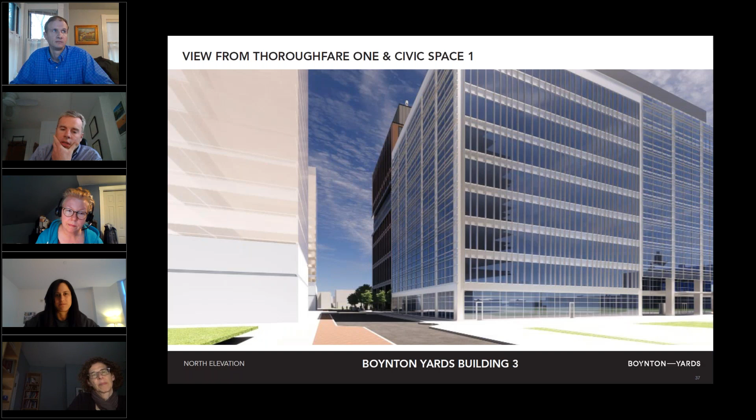Well, I mean, I think the view studies show that this is going to be seen from a number of vantage points, especially from the east, where this will be the tallest building adjacent to that existing neighborhood. There won't be another building to the east of that.

Actually, we're developing a building to the east, in this direction. We have a future plan to develop something across Harding. It's in the works, so there will be a building that will cover pretty much most of this facade view. But it won't go up 9 stories, because it's in an MR mid-rise district, so it'll somewhat create a scale transition, which we think is good towards the neighborhood on the east.

Yeah, but I guess that's not part of what we're reviewing today, and it's not part of the approved master plan to date.

So, to me, the north side of the building feels very planar. It lacks the dynamism of the south side, and that is the Somerville-facing side of the building. I think the break in the terracotta bays will help that, but it's still a plane, and there will be a box-like reading of that. I think it's unfortunate that our own zoning is maybe getting in the way a little of the ability to shape the building and achieve what it sounds like you're interested in doing, and maybe what we may want as well.

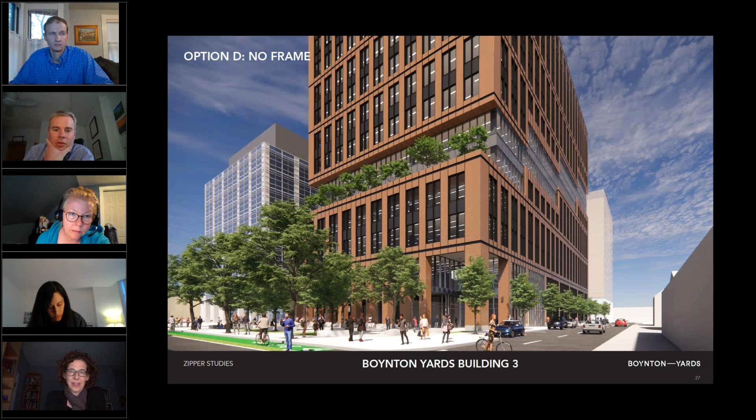So if we talk about the north side, or are you done? Did you have other things you wanted to say, Tim? No, we can talk about the north side. Okay. Yeah, I really appreciate the studies we've done here.

I think B and C are pretty strong. To some of the points you were making, Tim, I feel like B, in the way people would experience the building, having that scaling element, as you called it David, of the canopy, is a good move. I think C is interesting, and could be more interesting when you look at the landscape design Ian presented. But in the end, having that scaling element along the whole side is more in keeping with the building and makes the north distinct from the east side entrance, which is a little more localized.

We agree, that's our preferred option as well. I would also agree with that. I think adding the landscape really helps to visualize what was going on with this facade, so thank you for showing that. I think option B is a good scaling element, and it doesn't treat that door as a main door, but still kind of recognizes it as an entrance.

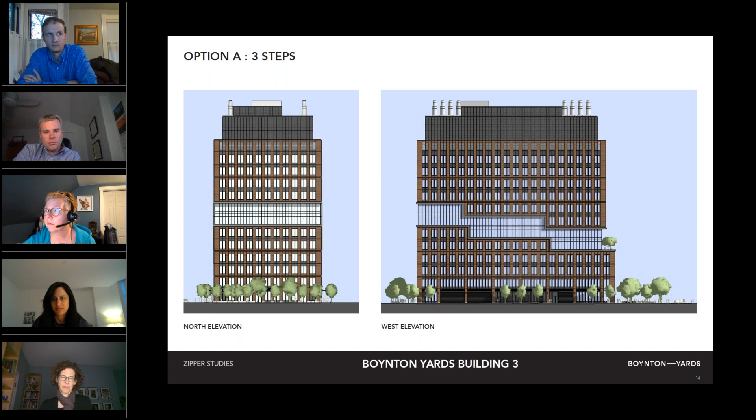The thing is, the symmetry gods get upset when we start to go off grid, where this tooth ends up coming down and then it doesn't quite align with the other bay at the base of the building. So that's why we're opting for that. And most of the time you won't see it like this. I think what you will see is more looking down Harding from these perspectives, so it's a little bit more interesting. I think the 5-step felt like it was a little bit too busy through the center here.

Yeah, I think a lot of the comments you made are a lot of the comments we've been kind of debating internally as well.

Yeah, I would say my reaction to the 5-step, it's great to see that option, but in terms of the aggressiveness of how it travels across the facade versus the calmness of the terracotta, it felt like it was a little too aggressive, which is why I was looking at the 3-step.

All right, we're getting close to time. And I also want to emphasize Tim's point about the recess. I think having the same detail at both ends will help. And some sort of change in plane in that north facade, or a little bit more change in plane that balances the south, I think that would help.

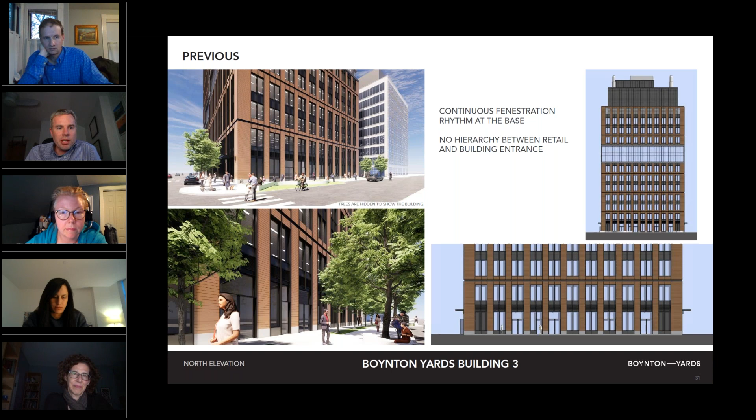But for that recessed detail to be built, and there's a column line along that wall, there's going to need to be a commitment to structural transfer or whatever else is necessary to make that work. I think it would be more interesting to overhang, actually have that whole top shifted, you know, and I know that can't be done. I know that's not acceptable. But I think that would be even more interesting, actually, on the north side.

Yeah, I mean, that was our first option, we have renderings of it, but it was shot down in the first meeting.

Maybe one of the reasons I keep with the 3-step option, my eye keeps being drawn to the width of the zipper elements, is because there's such a rigor to the building. The repetition of this single two-story bay on all sides, around all sides. At the base, there's a repetition of the same bay again and again. And I think, like we talked about last time, there's an elegance to that, well proportioned throughout.

But then we get to this very prominent zipper element, and each module is slightly different. It's not like there's two really narrow ones at the end and one big one in the middle. They're close, but not quite.

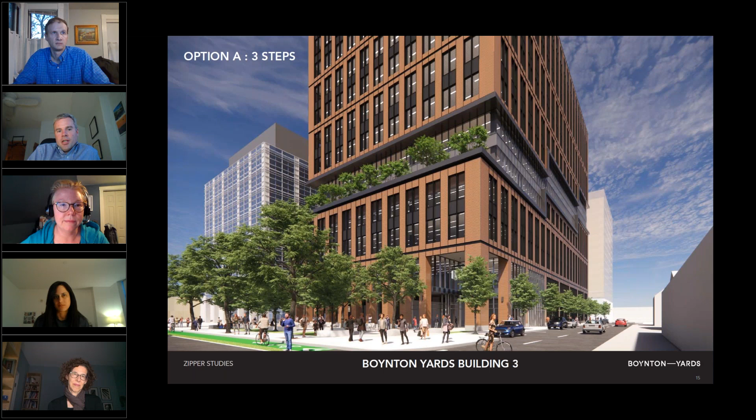Motion by Deborah. Do I have a second? Seconded by Tim Hood. Roll call vote for the 3-step option: Deborah Fennick, yes. Tim Hood, yes. Tim Talon, yes. All right, the 3-step option is the voted-on option.

On the north elevation, I think a couple of you indicated option B. Do I have a motion for the approval of option B? So moved, motioned by Deborah. Do I have a second? Second, seconded by Tim Hood. Roll call vote on option B for the north facade: Deborah Fennick, yes. Tim Hood, yes. Tim Talon, yes. All right.

So the other votes we have to take this evening are whether the design guidelines have been met for the high-rise district, and voting to incorporate any additional design guidance. Do I have a motion that this project has met the design guidelines for high-rise?

So moved. I heard Deborah first, so motioned by Deborah. Do I have a second? Seconded by Tim Hood. Roll call vote: Deborah Fennick, yes. Tim Hood, yes. Tim Talon, yes. All right, this project has met the high-rise design guidelines.

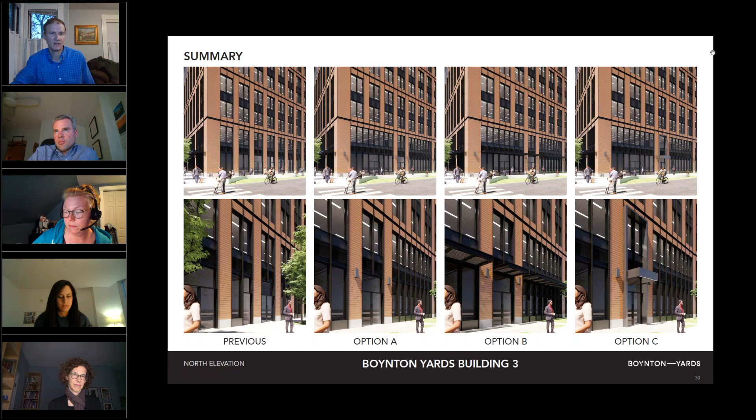I think last time we saw this project, we talked about how the terracotta was terminating at the top. I think there's going to be review of that, maybe getting slightly taller. Has that been looked at, or is that not an option to look at? Not sure about that. We can make it a design recommendation if you would like them to look further at the top.

Right now the top story does go up another level, so that's a fake last level that covers some of it. Yeah, we did raise the wall system up an additional floor to reduce the impact of the penthouse and make a little more transparency there, so you can see it's not just covering it, but a little visual transition between the top of the facade and the penthouse itself. Gotcha, so it's already reflected here. Yes. Okay.

All right, so then I think the additional design guidance is just about the zipper and the north and south facades. Do I have a motion for the design recommendations? So moved, motioned by Deborah. Do I have a second? I will second, seconded by Tim Hood. Roll call vote: Deborah Fennick, yes. Tim Hood, yes. Tim Talon, yes. All right, that completes the votes for the 99 South Street project.